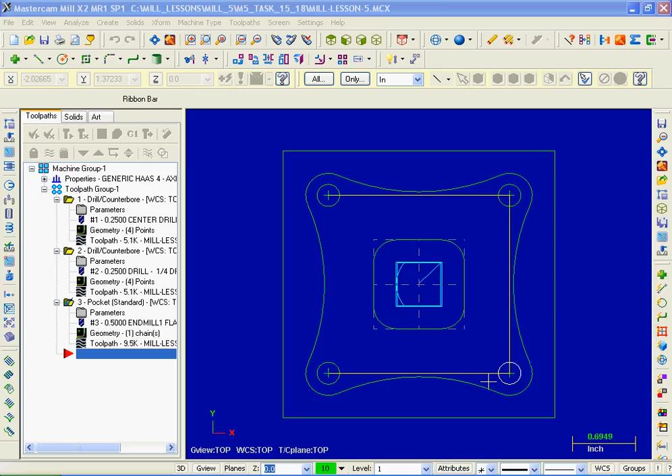So let's get started. I'm going to go up into Toolpaths and right at the very top click on Contour Toolpaths. Now on the screen we're prompted to select Contour Chain 1, and on the left the Chaining dialog box appears.

What I'm going to do is click on this radius on the left side of the part, and as you can see the green arrow is pointing upwards. Now the material for this part is aluminum, so to attain a good finish when contouring, climb milling should be employed, so the arrow is pointing in the correct direction.

If you ever need to reverse this arrow, reverse the direction, over in the lower part of the Chaining dialog box just click on the reverse button and that will reverse the arrow. I'm just going to click it one more time to take it back to what we had. Now we're done here, I'm going to click on the OK button.

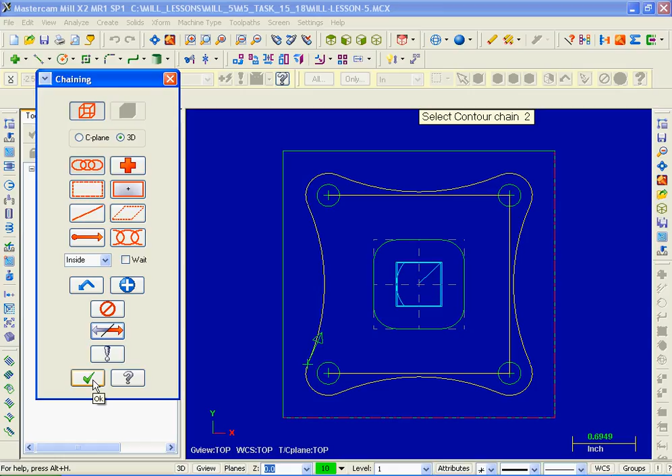Now we're using the same 1/2 inch end mill that we used to machine the pocket, so I'm going to click on the end mill. Feed rate, I'm going to change that to 10 inches per minute. The spindle speed, 4,500. The plunge rate, I'm going to change that to 10 and I'm going to check mark rapid retract.

Also let's switch the coolant on. The flood, I'm going to change that to on. We're done here, so I'm going to click on the OK button.

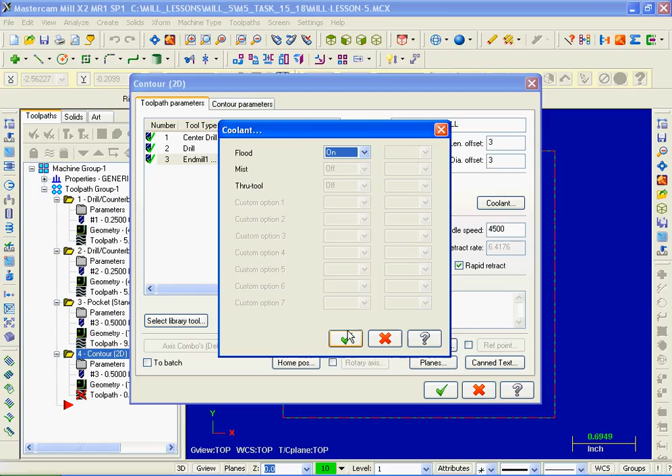So we're all done on the toolpath parameters page. Let's move over to contour parameters. Now starting at the top, clearance is set to 2, it's absolute, that's good. I'm going to check mark use clearance only at the start and end of operation. The retract is in absolute and it's set at 0.1, that's good. Feed plane absolute 0.1, perfect. Top of stock is in absolute, set at 0. Depth absolute, I'm going to change that 0 to minus 0.125.

Everything looks good. Now just below I'm going to check mark multi-passes, and also as you can see lead in out is check marked as well. I'm going to click on the lead in out and I've got a few things to change here.

Starting at the very top of this dialog box I'm going to uncheck enter exit at midpoint. Down below gouge check, I'm going to leave that turned on. Now for the entry length, instead of 100% I'm going to drop it down to 75%. Likewise with the radius, I'm going to drop that down to 75. Over on the right hand side in the exit, the length, I'm going to drop that down to 75. Also the radius, same thing.

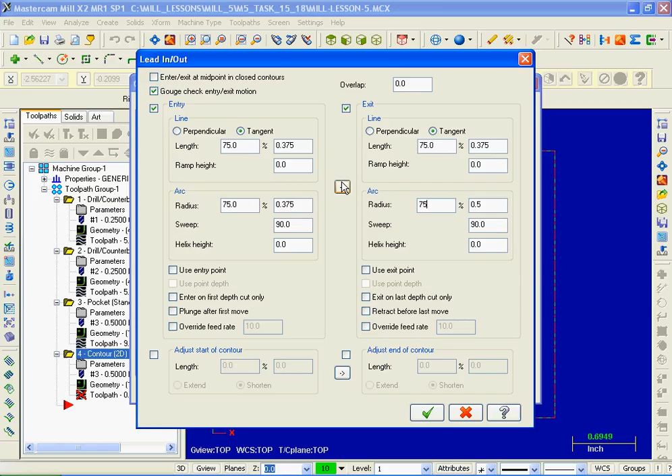Everything's looking good here, we're done. I'm going to click on the OK check mark.

Now we need to go into multi-passes and set up a few things. I'm going to click on the multi-passes button, and right at the very top, roughing pass is number 1, that's great. The spacing, I'm going to change that to 0. The finishing passes, I'm going to change that to 1, and instead of spacing of 50 thou, I'm going to change it to 30 thou, 0.03.

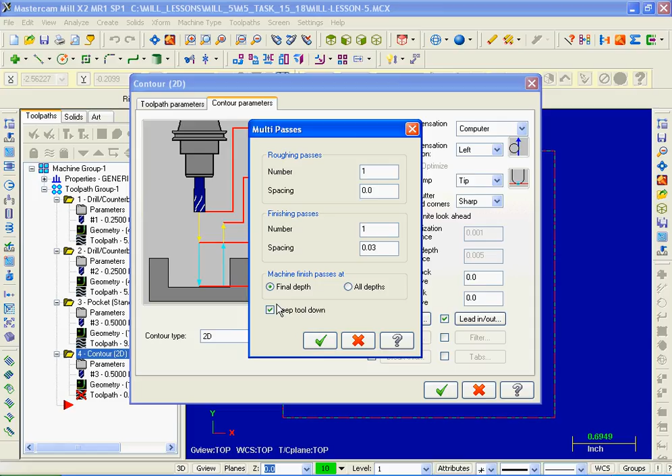A couple of things just below, machine finish passes at, I'm going to change it to final depth. One last thing before we leave, I'm going to check keep tool down. We're done here now in multi-passes. I'm going to hit the check mark, and contour parameters, everything is set up just fine, so I'm going to hit OK.

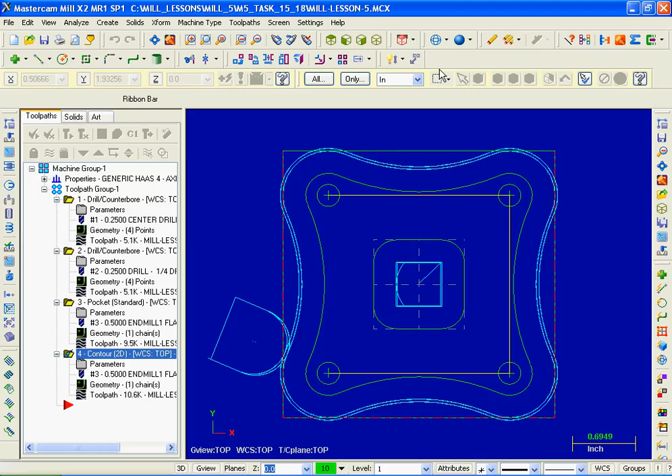And there's our contour toolpath. Let's go and verify the toolpath now. So I'm going to move up to the top and select an isometric view. I'm going to slide over to the left and do a screen fit.

Now over on the left in the toolpath manager, I'm going to click on the icon to select all operations, and it's captured all our 4 operations, and now we're ready to go into verify. So I'm going to click on the verify selected operations icon.

The speed, I'm just going to slow it down a wee bit. I'm going to go into configuration and I'm going to check mark change tool color. All done here, I'm going to pick on OK.

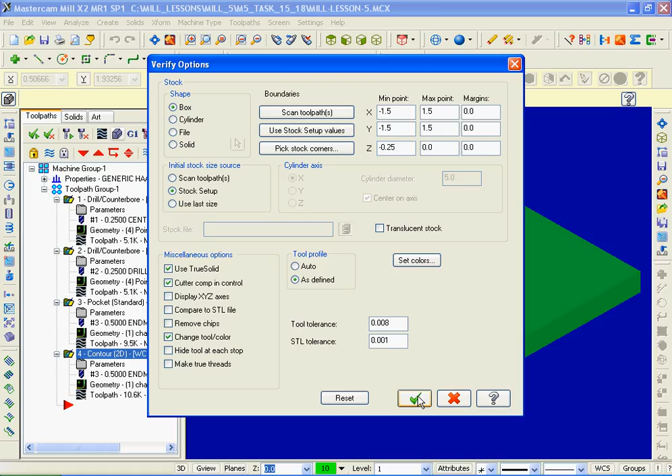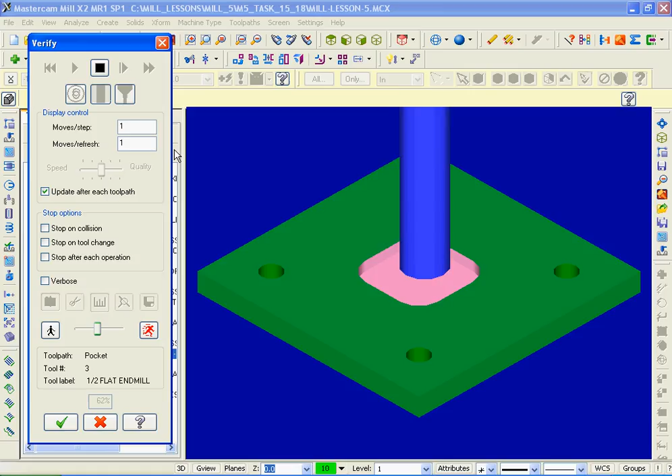Up to the very top I'm going to click on the machine button. Up first is the centre drill, so we centre drill 4 holes, then a 1/4 inch drill drills the holes through the part. Up next is the 1/2 inch diameter end mill. We machine the pocket out, and then the last operation we rough and finish the contour.

And there's our verified part. Looks good. I'm going to click on the OK button. Next I'm going to move on up and click on the Save button.

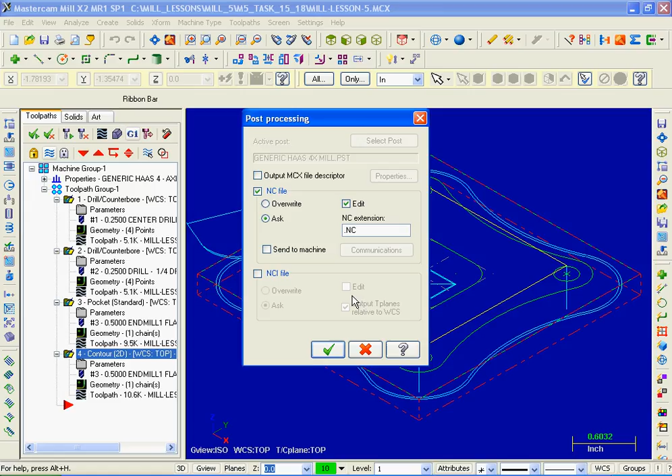Next we're going to create the CNC code. All the operations are selected. I'm going to click on the post selected operations. I'm not going to change anything here, so I'm just going to hit the green check mark for OK. For the name I'm going to accept Mill Lesson 5 and hit the Save button.

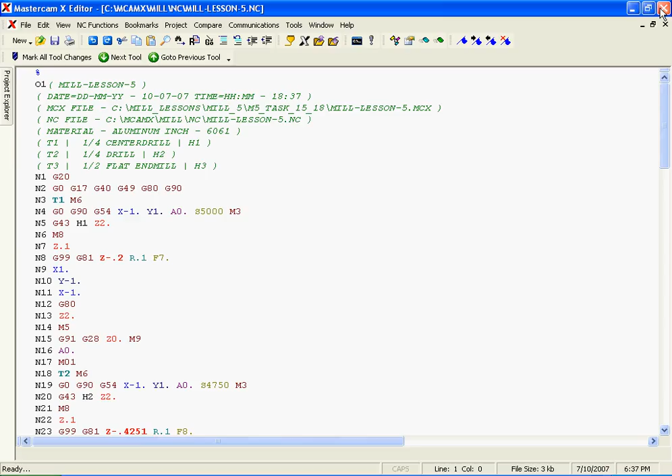And there's our G-codes for this program. I'm going to hit the X in the top right corner, and that completes Lesson 5. Thanks for watching.